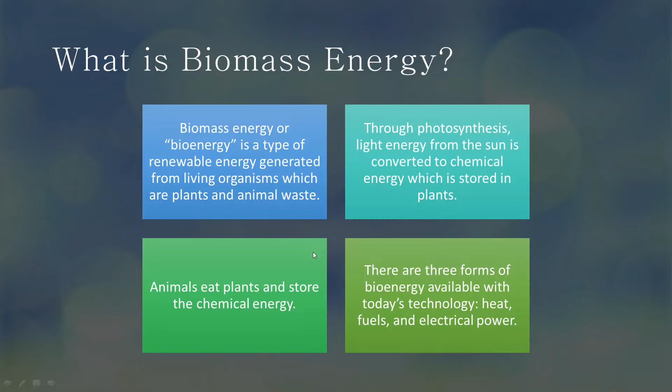Biomass is available almost everywhere in the world. Biomass is divided into primary and secondary sources. Primary biomass energy sources are plant materials grown for energy production such as wood, crops, fruits, maize, sugarcane, and sunflower seeds, which get converted to sunflower oil. Secondary biomass energy sources are waste materials which can be used for energy production, such as plant residue, paper mill sludge, sewage, fish, and animal waste.

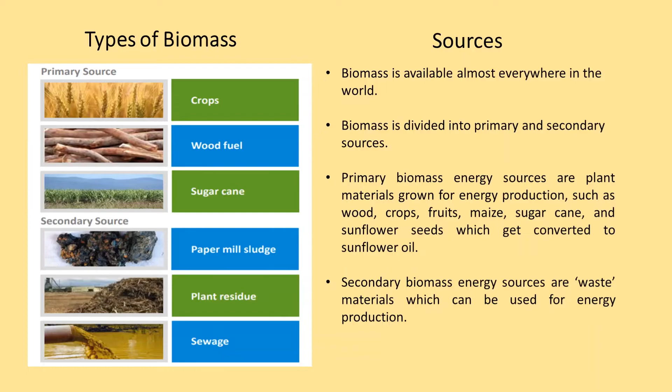Okay, for the advantages of biomass energy. First of all, biomass is always and widely available as a renewable source of energy. The organic materials used to produce biomass are infinite, since our society constantly produces waste such as garbage and wood. Second, it is carbon neutral. As a natural part of photosynthesis, biomass fuel only releases the same amount of carbon into the atmosphere as was absorbed by plants in the course of their life cycle.

Third, it reduces the over-reliance on fossil fuels. Not only is there a limited supply of fossil fuels, but fossil fuels come with environmental baggage, including the release of large amounts of carbon dioxide into the atmosphere and the pollutants that result from removal, transportation, and production. Fourth, it's less expensive than fossil fuels. While fossil fuel production requires a heavy outlay of capital, such as oil drills, gas pipelines, and fuel collection, biomass technology is much cheaper. Manufacturers and producers are able to generate higher profits from a lower output.

Next, biomass production adds a revenue source for manufacturers. Producers of waste can add value by channeling their garbage to create a more profitable use in the form of biomass energy. Last but not least is less garbage in landfills. By burning solid waste, the amount of garbage dumped in landfills is reduced by 60 to 90% and reduces the cost of landfill disposal and amount of land required for landfills.

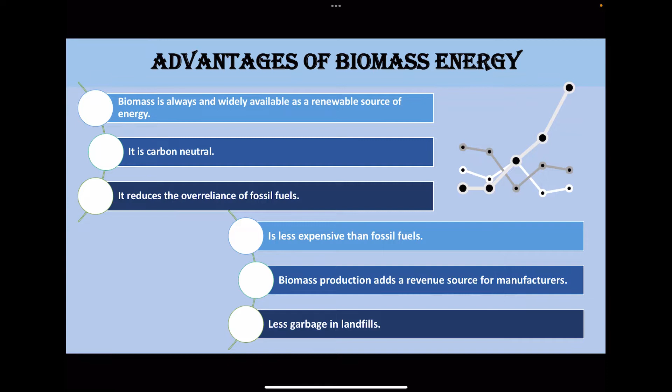Next, types of biomass power generation. There are two types of biomass power generation. The first one is combustion, and the second one is anaerobic digestion. For a detailed explanation, Arman will explain it next.

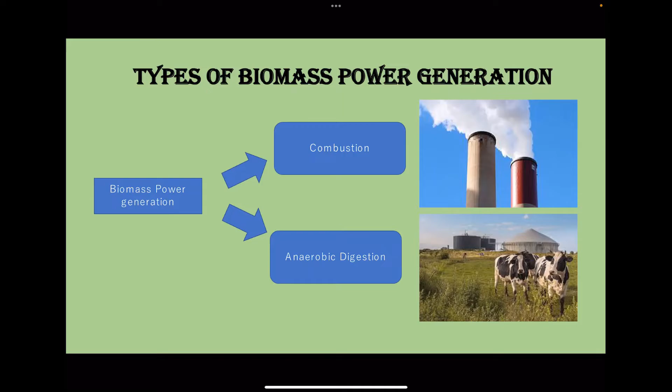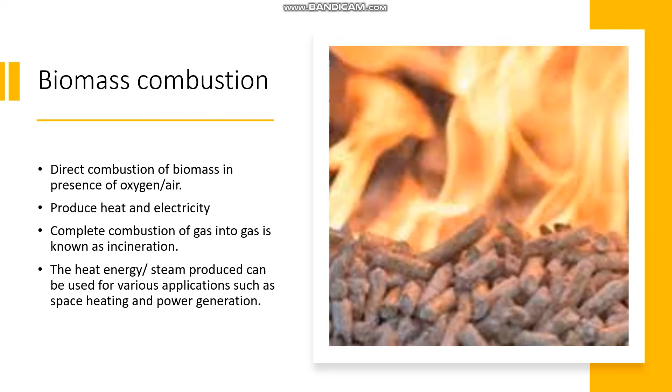So let's continue with biomass combustion. What is biomass combustion? Biomass combustion is a direct combustion of biomass in the presence of oxygen or air. It can produce heat and electricity, with a complete combustion into gas, which is known as incineration. From biomass combustion, the heat energy or the steam produced can be used for various applications such as space heating and power generation.

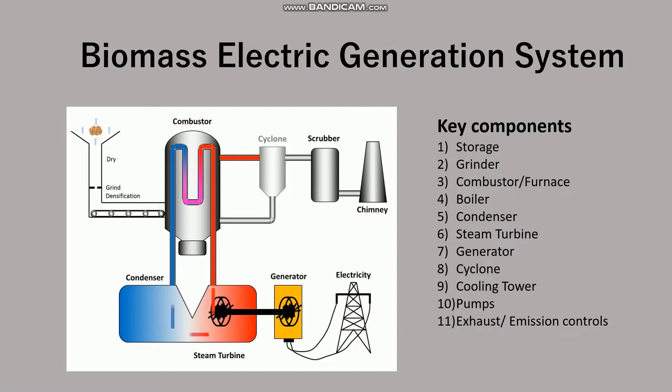So there are 11 key components for a biomass electric generation system, which are storage, grinder, combustor or furnace, boiler, condenser, steam turbine, generator, cyclone, cooling tower, pumps, and exhaust or emission controls. In this part of the video, we will explain the operation of biomass combustion. As we know, a biomass power plant generates electricity using the heat generated by the combustion of organic materials, such as plant residues, household waste, and the biogas resulting from waste fermentation.

All of these are renewable energy sources available in large quantities. The fuel is brought to the boiler. It is then introduced into the combustion chamber, where it releases heat as it burns. This in turn heats water in tubes that line the boiler. The hot water is then sent to a tank where it is turned into steam.

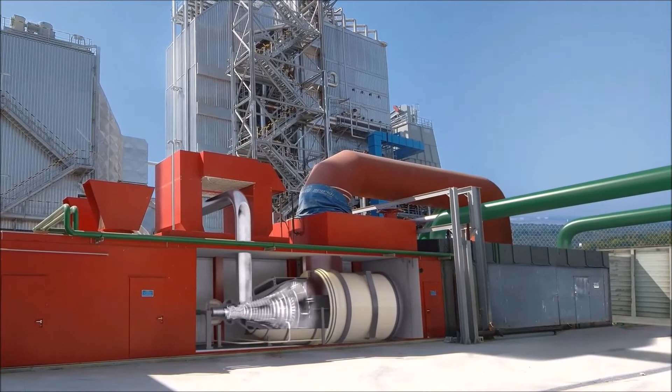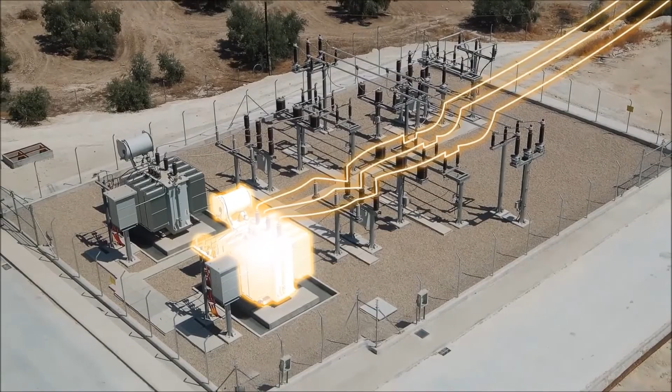The steam drives a turbine which turns a generator. In the generator, the interaction between the electromagnets of the moving rotor and the copper coils on the stationary stator produces an electric current. A transformer is used to increase the voltage of this current to 225,000 or 400,000 volts. This makes it easier to transport in the network's very high voltage lines.

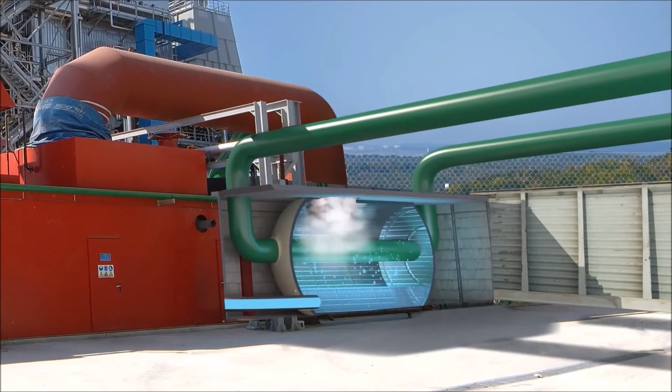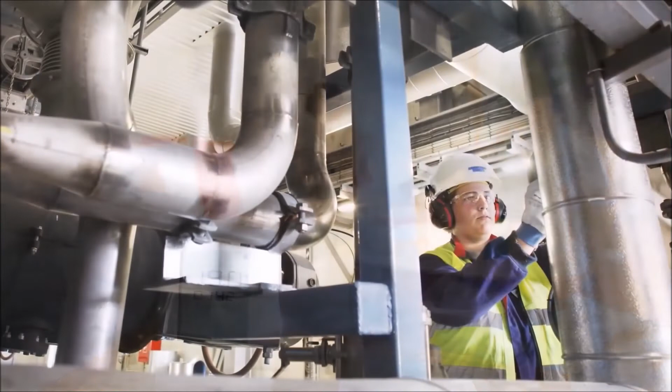The steam from the turbine passes through a condenser in which cold water circulates. This cools the system, turning it back into water. It is then sent back to the boiler. This steam can also be used either for industrial activities or to supply an urban heating network. This simultaneous production of electricity and heat in a single facility is called combined heat and power.

Finally, the fumes released by combustion are filtered before being evacuated through stacks, often installed in very close proximity to material production or storage sites. Biomass power plants can be used continuously to meet electricity needs that produce regular energy with low carbon dioxide emissions.

So the second type of biomass power generation method is anaerobic digestion. Anaerobic digestion is the process where microorganisms break down organic matter in the absence of oxygen. The anaerobic digestion takes place in a sealed environment, and this process produces biogas such as methane, carbon dioxide, nitrogen, and oxygen from organic waste.

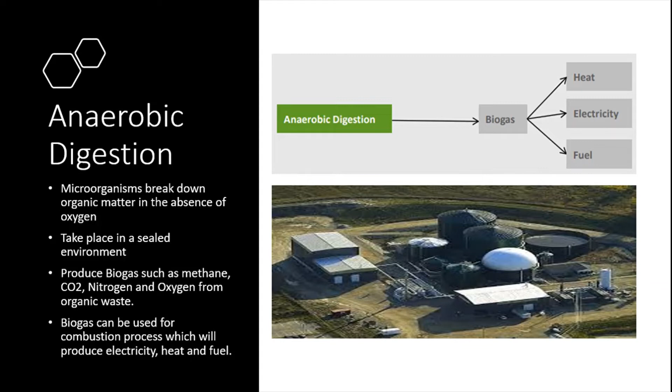And the biogas produced from this process can be used for combustion, which will produce heat, fuel, and also electricity, which can be transferred to the national grid network. So as you can see, this is the basic construction of the anaerobic digestion method. One of the key components in this process is the anaerobic digester. So what is an anaerobic digester?

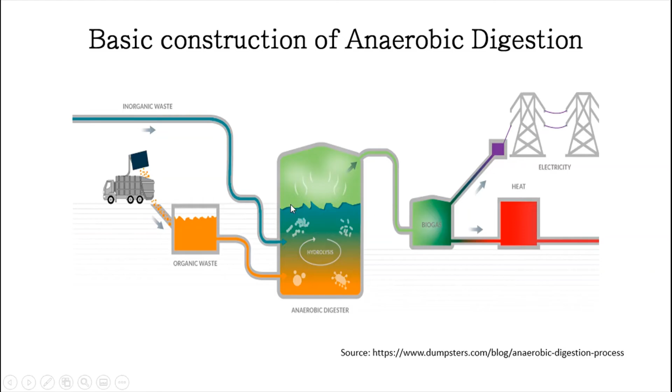An anaerobic digester is a place where anaerobic digestion takes place, and it is a sealed metal and oxygen-free tank. In this anaerobic digester, multiple organic materials such as food waste, energy crops, crop residue, and even greases can be combined together. Besides that, in this anaerobic digester, a biochemical reaction known as hydrolysis will take place. And this is one sample picture of an anaerobic digester.

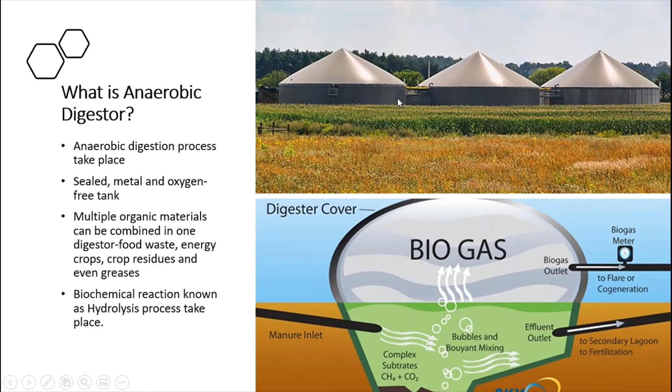So how does the anaerobic digestion process work? Firstly, food waste or residue will arrive at the anaerobic digestion facility, and after that, the food waste will be transferred to a large sealed oxygen-free digester tank. After that, the third process is the biogas creation. This is where the anaerobic digestion process will take place.